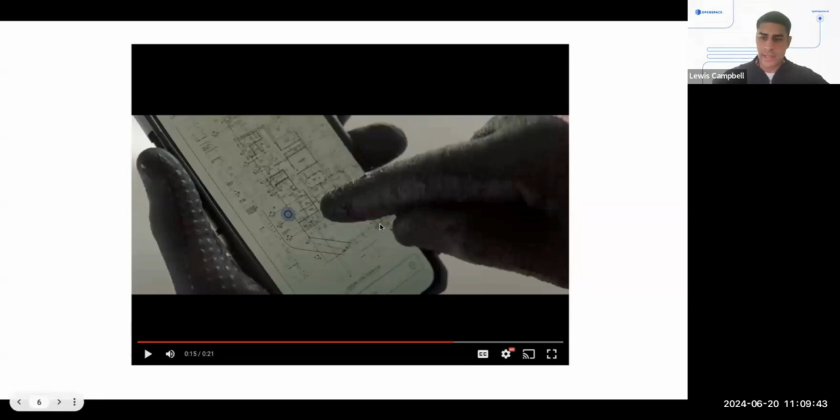So all you simply do is choose the sheet that you're on. Let's say you're on level 3 next to a lift shaft - you drop the pin where you're standing, and off you go. You walk around the site, and OpenSpace is doing your 360 walkthroughs.

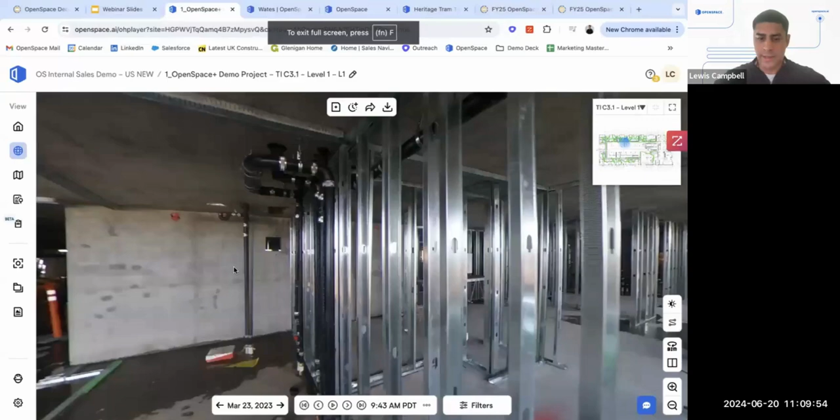And this would be your end output from that. You get this full 360 view of everything that's been captured on that particular date. And this here is like your mini map - the GA plan that you've pre-uploaded almost acts as your mini map. The green squiggle that you see in the mini map is basically the path that individual walked through on that given day.

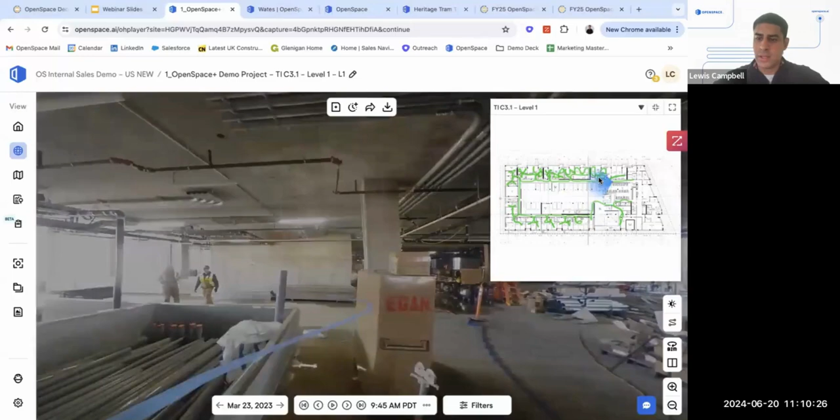So if I wanted to move around this area, and again it's very similar to Google Street View, what I can do is basically drop on the floor plate, and it'll navigate me through the capture from that particular day. Or I can use my blue capture path, and it'll take me through the capture that's been taken on that particular date as well.

So essentially these cameras are taking a picture every half a second, and OpenSpace is essentially just pinning that half-second capture to the floor plan. So as I want to see what's happened on site from one week to the next, you're essentially building up a time frame of everything that's happened or captured within that space.

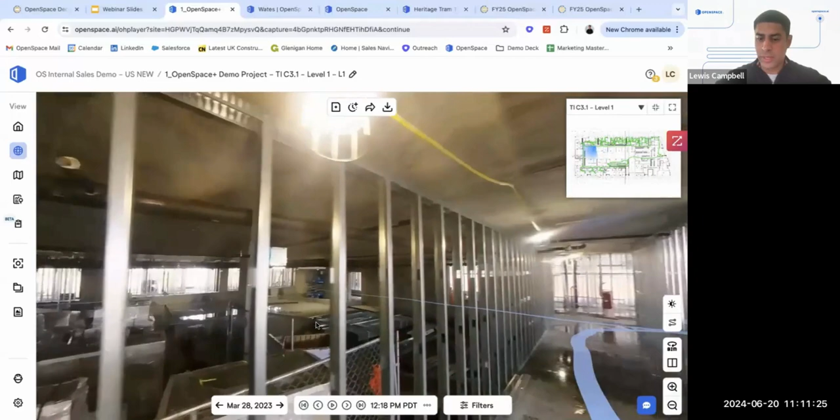So if you wanted to verify works that have happened, or in a worst case scenario if there's a claim made from one date and you're saying progress has been made from one week to the next, everything highlighted in a darker shade of blue is basically a capture that's been taken in that particular spot. So you can verify quite easily, within a click of a button, what's actually happened from one week to the next. It avoids any ambiguity and makes the whole project far more open and honest.

And the lighter shade blues show where the platform is clever enough to realize a capture's been taken in that spot, but it may be four or five meters away from that particular capture. So if there's any M&E contractors here, if you're trying to verify quality of install, you can quite easily do this. And even from a fire stopping perspective, which is a bit of a hot topic in the UK at the moment, you can verify the quality of some of that fire stopping going in as well.

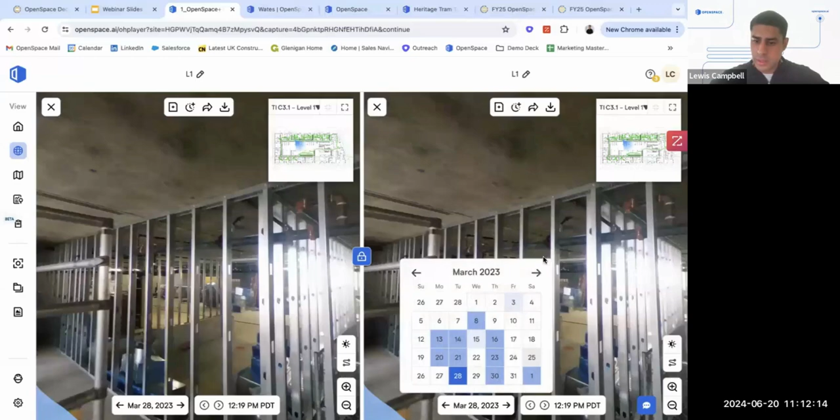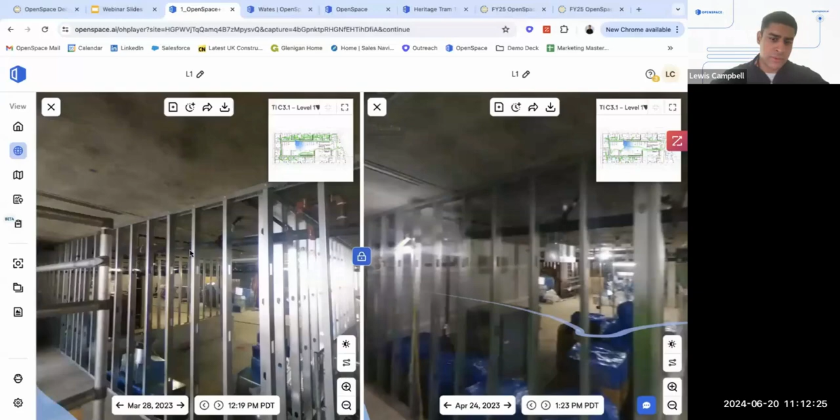Another functionality you get from this and doing the captures is essentially a split screen view where you can peel back the layers from one particular spot. So if I were to verify, once my walls have started to get fit out or I've started to cover over ceilings, but I want to see where the piping is, you can basically pull up a split screen view from one week to the next, and again verify what work has happened in that area, locking the screen for comparison.

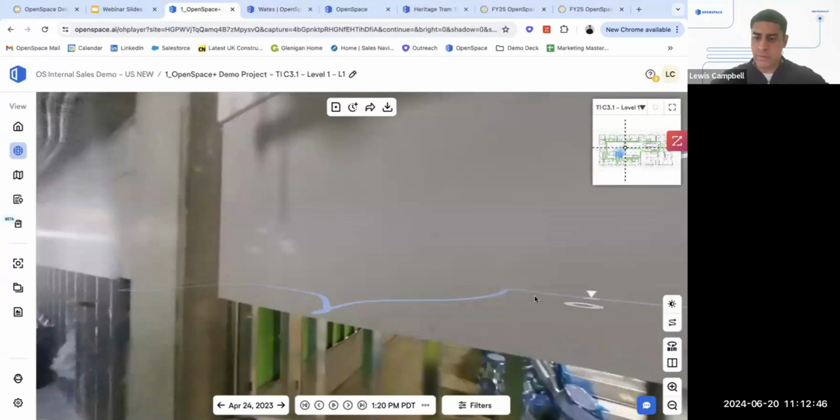And for those on the call that aren't really aware or aren't using any snagging tools, what you can also do within the platform is create what we call a field note. So if you're walking through the site, you can either do this within the app itself, where it takes a high resolution picture, or you can do it after the fact when you're back in the office, creating these field notes as essentially a snag of that particular area.

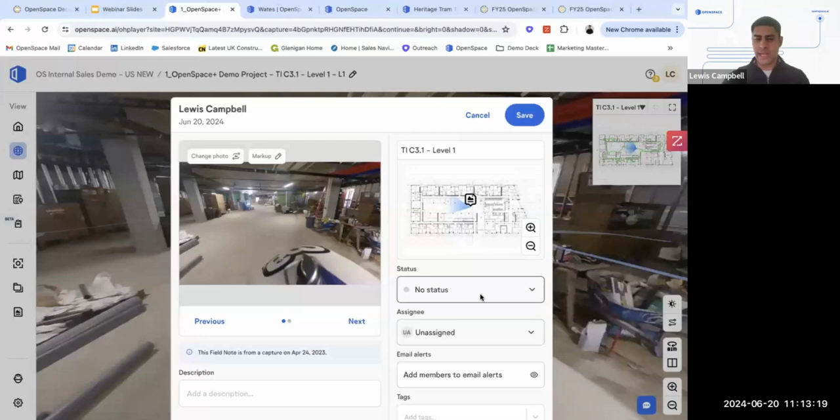So let's say there's a safety issue you want to raise and put forward to the rest of the team. You can hover over that particular spot and it'll create a screen grab of that area. You can see it's pinned onto the floor plate, and then you can write in a description of what that particular issue is.

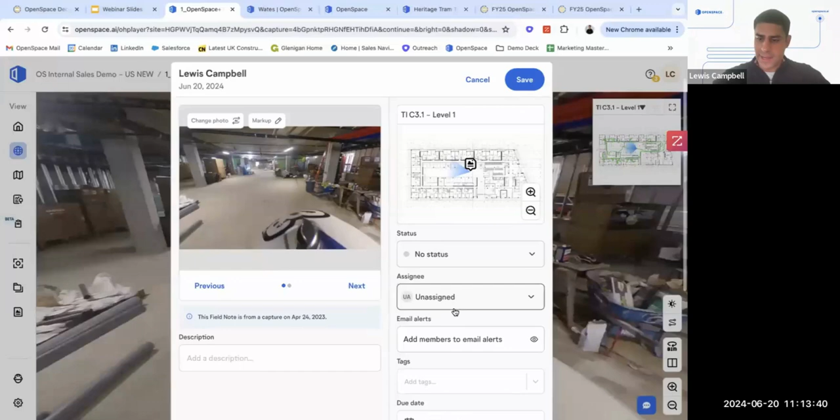And then you can make it blatantly obvious what you're referring to by marking these up with text boxes and arrows. You've got your description box where you can put more information, assign it out to other individuals, and all of these statuses and tags can be customized to suit your workflow. You can also put due dates against this.

But the whole idea with what we're creating with field notes and with OpenSpace in general isn't to be a standalone platform. So we do integrate with other platforms such as Procore, where you can manage your issues within these, and we also integrate into ACC, or 360 as some people call it.

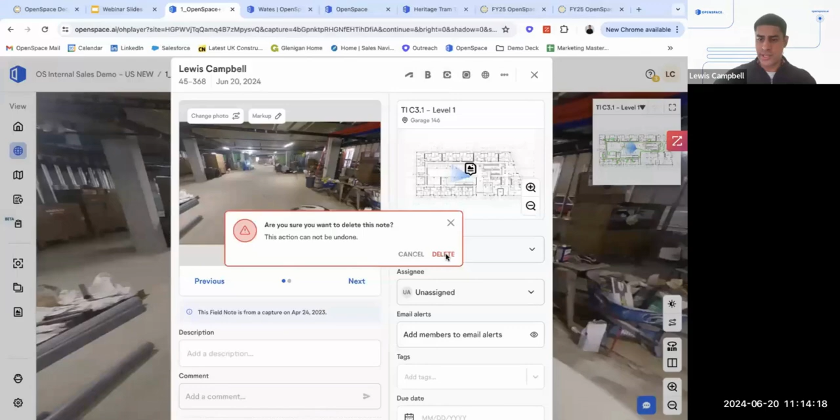But all of these field notes that you're taking also sit within the library within OpenSpace. So if I wanted to create a PDF report to share with my clients or another M&E contractor on site, I can filter out the issues taken here. If I wanted to find all my electrical and mechanical issues, I can filter out all the tags I've created or assigned. Once I hit export, it'll create a PDF of those issues.

And again, for those of you modeling within BIM, very similar to that split screen view, we've now got the capability to upload your BIM model into the platform, and we align the capture against your model automatically.

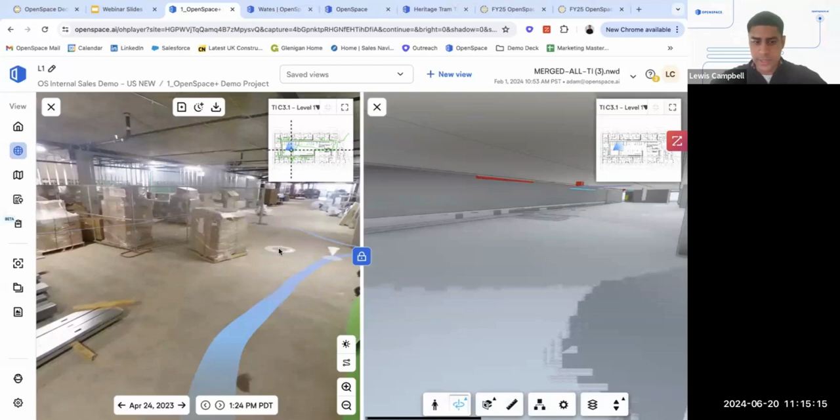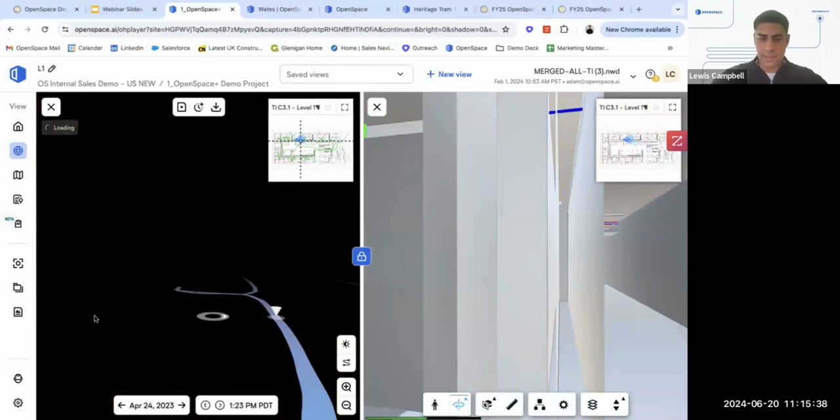So once you've done a capture for each level, OpenSpace then aligns your design against your reality captures. The beauty of this is you don't need to be very technical to navigate through your model and change the layers, etc. It's all done automatically for you.

So it's going to track you around the area of the captures and align it against your 3D model. So if you want to see that you're installing ducting, piping, whatever it could be that's within the model, in the correct spot, you can do that in a very easy fashion.

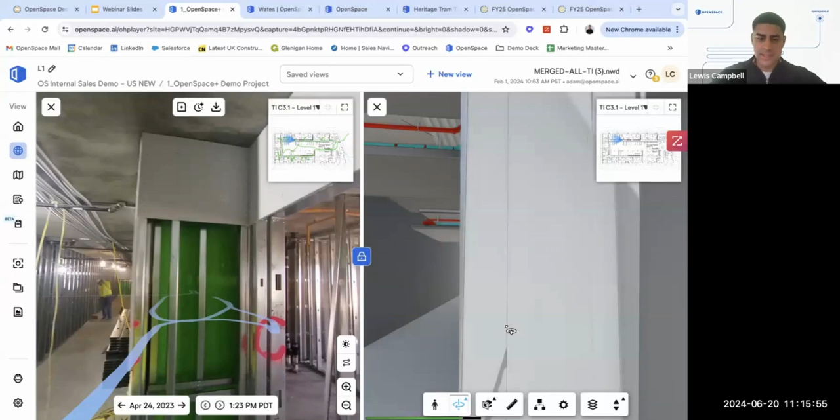And the next stage of what we've done with this - we realized that people on site aren't so technical with navigating through models and changing out the different sections, and we realized there's a big investment that the contractors are making within these BIM models.

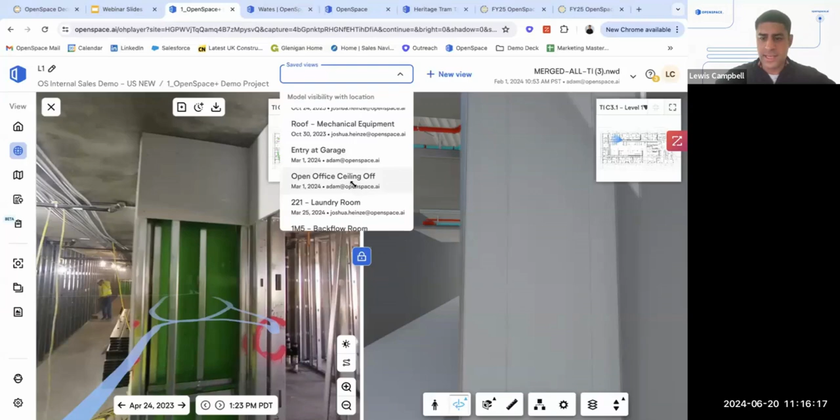So what we've done, very similar to what you can do within Navisworks, is essentially create the ability to have different saved views within the platform, where you can jump around, rather than hiding out the different elements individually as you get to that particular spot.

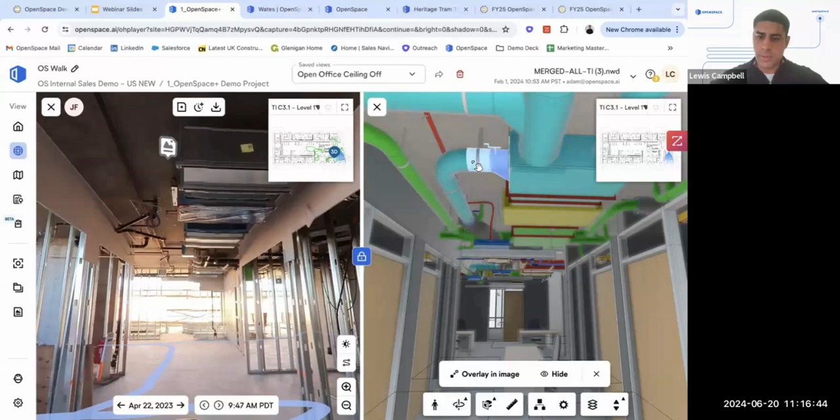You'd have the saved view automatically within OpenSpace, where you can quite easily jump into that area and have the ceilings removed or floors removed if you're trying to see where pipe work is. And then you're also able to essentially overlay your model into your 360 capture as well.

So in this case, if you've got a congested area with piping that's going in and duct work, and you want to verify it, or just get a quick and easy snapshot of what's going in that particular spot, you can overlay your captures and see that you're installing into the correct areas as well.

And inviting people in is very straightforward as well. Within the pricing that OpenSpace provides, you essentially get an unlimited amount of captures, so you can go out and capture every day. We've got companies that will basically use OpenSpace as almost like their end of day checklists.

So they'd walk the perimeter of the sites, essentially assuring that things are getting secured and there's no breakages with the hoarding. And then we've got companies that would use it on a weekly basis purely for their progress. And inviting people in is super straightforward as well.

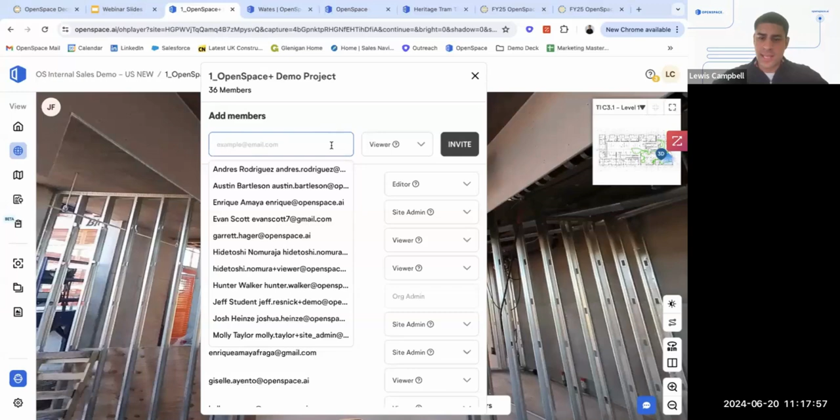And you get an unlimited amount of members that you can invite within each project within the pricing terms as well. It's simply just putting somebody's email address into the section here, and then you can give people different access rights. So you can make somebody a viewer where they can only see the content within the platform, or an editor where they're able to create their own field notes, which I just went through as well.

And obviously site admins can pretty much do all of the above, and invite other people into the platform as well. But in terms of core functionality, I think the message here is that OpenSpace is incredibly easy to use - and if you can use Google Earth, then you can pretty much use OpenSpace.

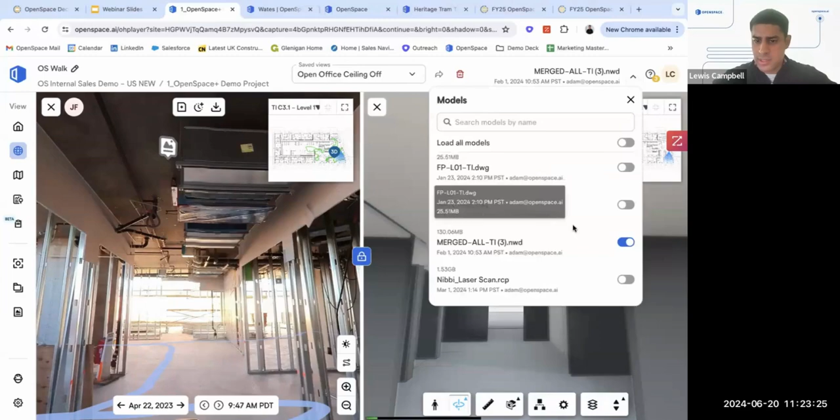So within BIM Plus, when you've got your BIM viewer here, I'll jump to a saved view that I've got. And again, to answer the question around file types, this is basically how you can federate your model within OpenSpace and just have different files uploaded. But in this case, let me just jump to...

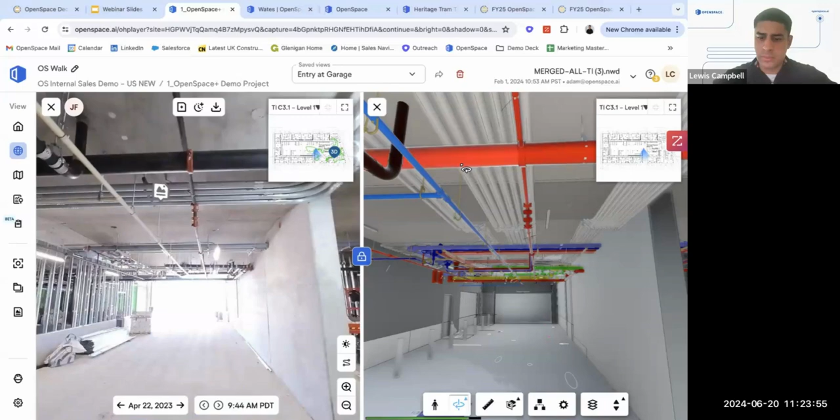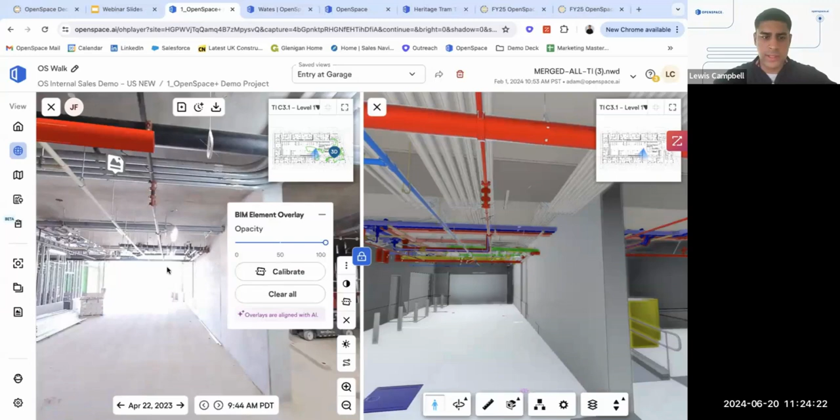Here we are. So if I wanted to select this pipe, for example, I can go through... typical, my computer started to slow down. But if I lock the screen here and select the different elements - I don't know if you can see the cursor, but as I select different elements within the model and click overlay, it'll throw in what's been designed within the 3D model against my 360 capture. So you go through and select the elements you want showing within the model itself, and you're essentially building up an idea of what's been installed.

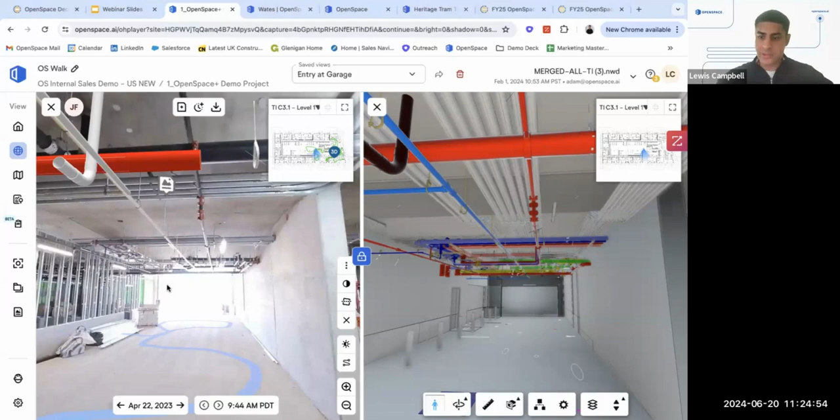So the whole idea of this is a very quick snapshot. Rather than going out on site and measuring up, which could take a couple of hours, you can do this within a couple of minutes to ensure things are getting installed in the correct spot to avoid clashes. Hopefully that answers your question there, Magnesh.

Can we use BIM model snip for field notes, and how? Yes, is the answer. So if I created a field note as I've got my BIM model open, it'll create a snap of that area. You can then push these out into BCF files as well, so you can push them out into the likes of Revizto or your Daluxes, and they're all coordinated.

There's a question here around how you could show point clouds in split screen view, and essentially it's just changing out or uploading your laser scan within Autodesk and turning that on within OpenSpace, so you can upload or ingest. We can now ingest your point cloud data.